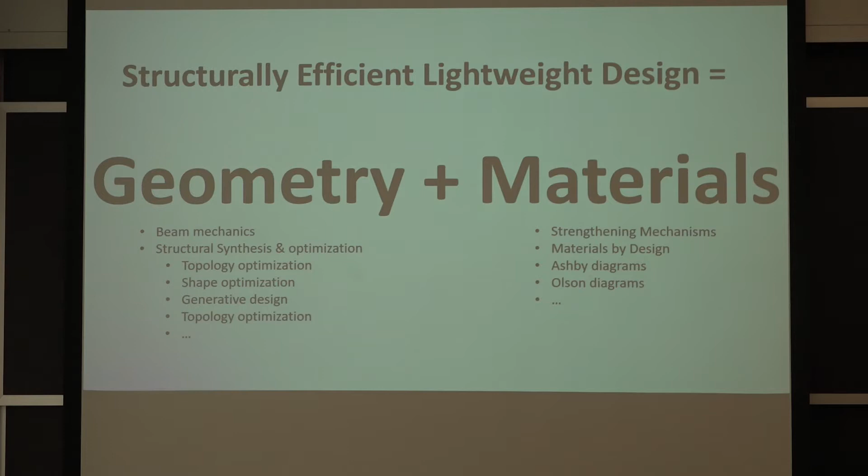We're going to start off where we left off last time, and that's lightweighting of a structure like a car body or a bicycle frame or a boat, could be a lot of things, an airplane, is a function of geometry and materials. I'm going to show you guys this every lecture, okay? Geometry and materials, because I think that's the main theme of this course, is that you can't really achieve lightweighting or structural efficiency without looking at both geometry and materials. You can't really get there. So that's one thing I definitely want you to take away.

So having said that, we're going to start off this lecture with a story. So here are two basically useless cars. You're lucky if you can get one person in either of them. You can't get anything else in besides there. You can barely get a sandwich in these things. These are tiny little cars. They're basically for people who have a lot of money to play on racetracks. They're not very useful. In fact, what's even surprising is they don't even get good gas mileage.

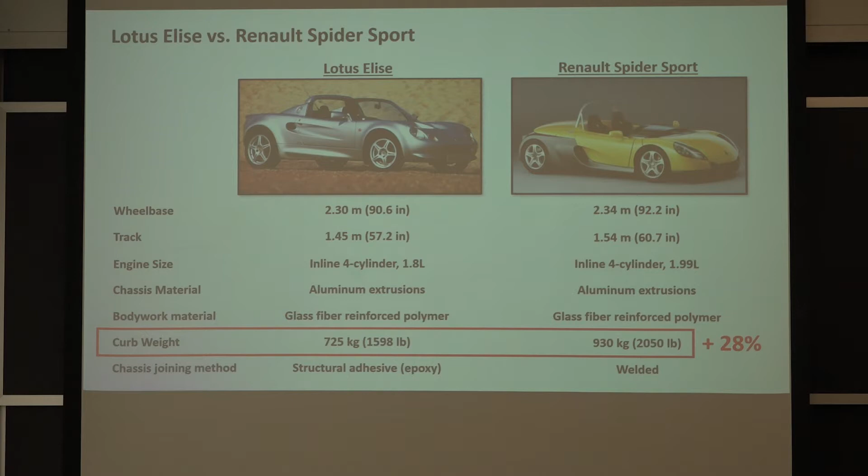On my right is the Lotus Elise, and on the left is the Renault Spider Sport. These cars came out at roughly the same time, about mid-90s, like 96 or 95. These cars have roughly very similar wheelbase, the distance from center line to center line of the wheels, and basically really close to the same track. The Renault is a little bit bigger by a couple inches, but not dramatically so. They both have a tiny little 4-cylinder engine. The Renault is a 2-liter and the Elise is a 1.8-liter, pretty close to the same.

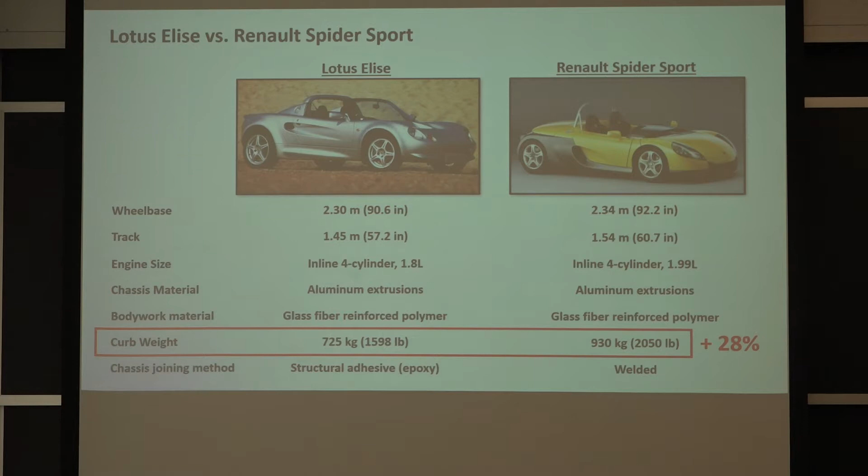Both these cars were somewhat revolutionary in that the primary load structure was made from aluminum extrusions. Do you guys know what aluminum extrusion is? There's ways you can take a billet of aluminum and jam it through a die and form a straight member with a uniform cross-section. They're very popular, like window frames use a lot. This is an extrusion right here, this aluminum piece on the board. You see a lot of them around.

Anyway, now here's where the kicker is. The Lotus was about 1,600 pounds, and the Renault was a little over 2,000 pounds. Yet the cars were roughly the same size. This kind of struck me as interesting. Back in the mid-90s when I was a graduate student, I used to obsess about this problem all the time, about why there was a 28% difference, over 400 pounds difference in weight between these two vehicles. So even though the Renault isn't that much bigger, it still weighs 28% more.

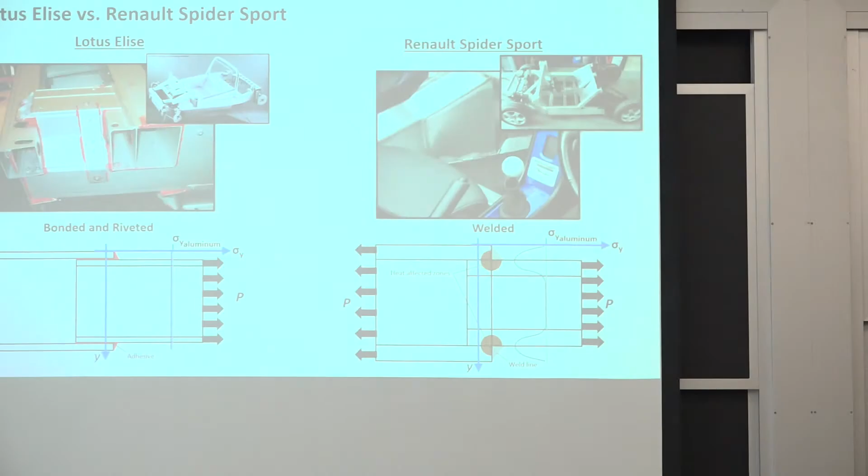So why is that? It turned out the reason came down to how the extrusions in the body structure were joined. And Professor Egger is not going to like this because I'm going to talk badly about welds, and he's interested in welds. The difference is that the Lotus chassis, as you can see in the upper right here, was glued together. The engineers at Lotus worked with a company called Ciba-Geigy, which isn't around anymore. Rumor has it they used an epoxy, although I'm not sure that's true, I'm beginning to think it was an acrylic. They took all these aluminum extrusions and joined them together using structural adhesive, similar to what would be used on an airplane at the time. On the other hand, the Renault, although it was also made of aluminum extrusions, was welded together.

The aluminum extrusions were all welded together to form the primary structure. And because of this welding, the Renault was a lot heavier.

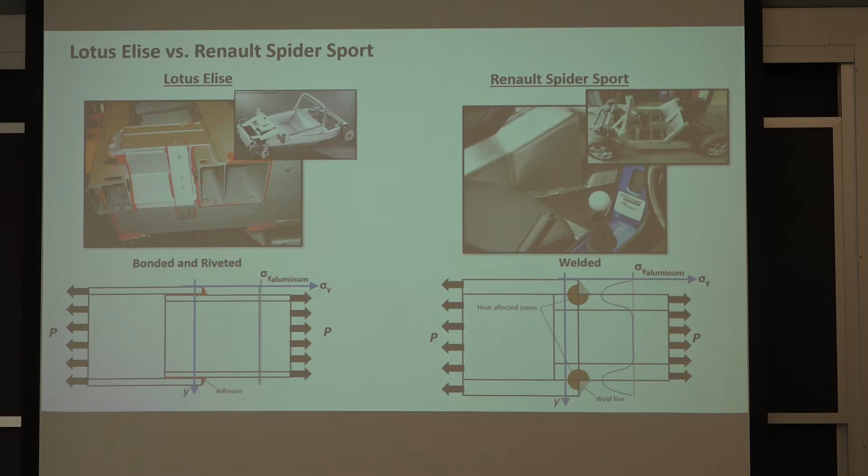Whenever you weld a material, like steel or aluminum, some people have called it casting in place. You heat the material up, it becomes molten, it flows, you put in maybe a filler material that's also hot and flows, and then it cools at some rate. That rate isn't real well controlled. What's driving the rate is all the material around it, heat transfer from that molten pool of liquid into the rest of the aluminum or steel around it. So it doesn't necessarily cool in a really controlled way.

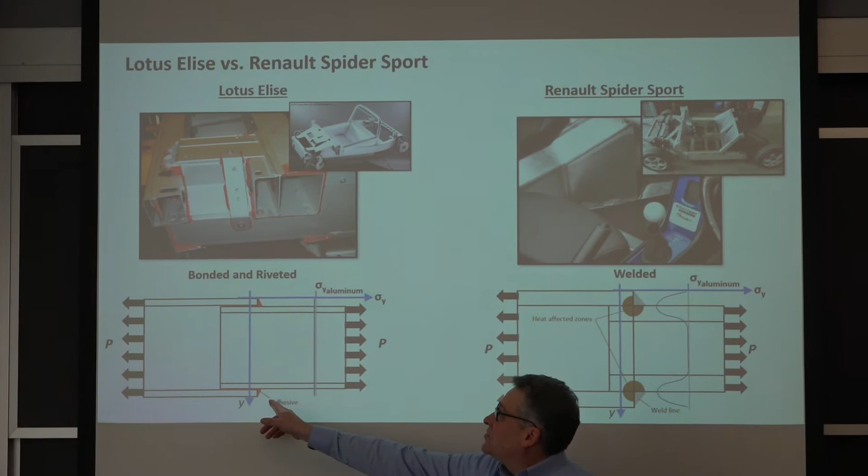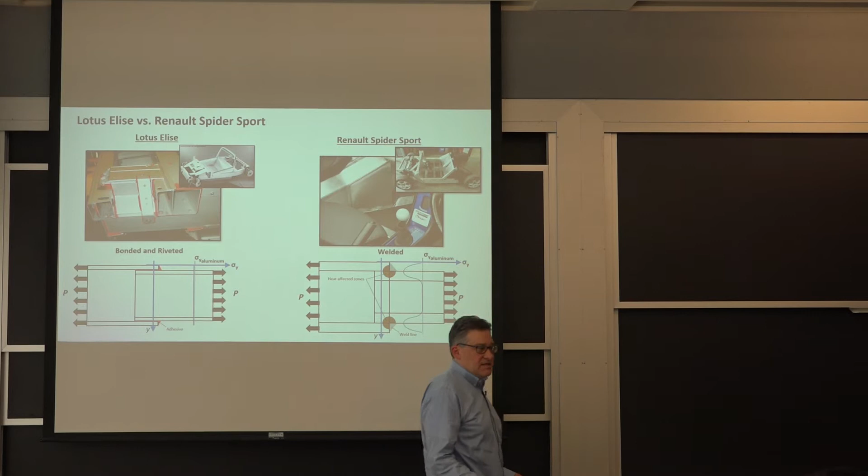And you don't end up with a microstructure that is, shall we say, perfect. If you were to plot stress across this material, here's two joints - this is just an overlap joint of, say, two tubes. The Lotus had these glued tubes, or parts that were glued together - you can see the red glue in the picture. If you were to plot stress across this material, the strength of the material stays constant because it hasn't changed. There was no welding, no heat cycle. The strength of the material is just as it was as it left the extrusion facility.

However, when you weld two tubes together, you get weakening of the material in what's called the heat affected zone. The area that got hot, when it cools, doesn't really cool to the optimal microstructure you wanted, and a lot of times it's softer than the material around it. Because of that difference in strength, the Renault engineers had to use much thicker wall thicknesses on those extrusions in order to get sufficient strength out of that joint. The Lotus engineers could go with a much thinner wall because they weren't going to lose anything.

Now, unfortunately, with extrusions, as things are today, you can't really go to variable wall thickness - you're stuck with one wall thickness. So because of that, the whole structural member had to be dimensioned in order to compensate for that difference in strength. And that's why the car weighed 400 pounds more.

So does everyone understand this? I'm pointing this example out because it illustrates how materials can affect the structural efficiency of a primary structure on a vehicle, a car, an airplane, or whatever it might be. So today we're going to talk about the materials side of this equation.

Okay, and this is the example just to illustrate, like I said - hold on a second, Victor - this is just an illustration of this example of how materials really can affect weight.

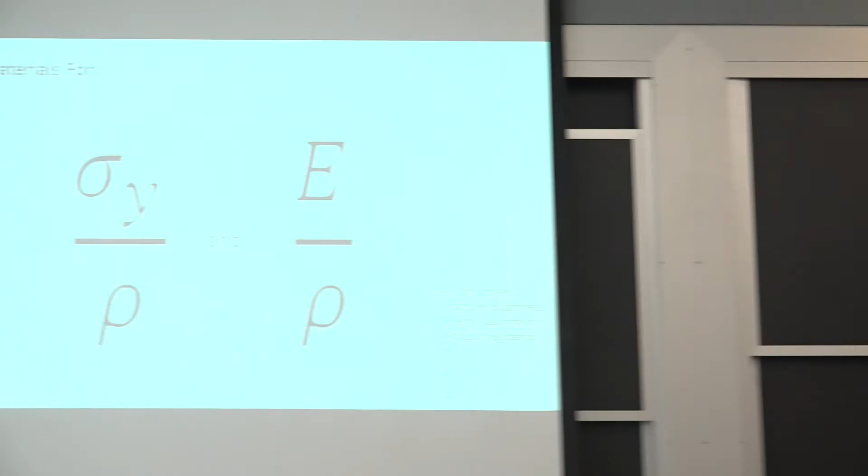So when you're interested in designing lightweight, efficient structures, the materials you need to design for, if anything, are these two factors: the yield strength per density, and the stiffness, the Young's modulus per density. These aren't the only parameters, but these are the ones I'm going to focus on for this lecture. Certainly there are other factors in making a lightweight effective structure, such as fracture toughness, energy absorption when it comes to cars for impact design, and fatigue resistance. There's a bunch more, but for simplicity we're just going to focus on these two. But how do you design a material to do that? How do you take some lump of metal and figure out a way to make it strong and stiff?

You really can't do much with density for most materials, it kind of is what it is. You get aluminum, you get steel. In fact, for most materials, you really can't do much about Young's modulus either, you're kind of stuck with what you got. There are some exceptions, like lithium-alloyed aluminum, where you can decrease density or increase stiffness, increasing this ratio, but for the most part you're stuck with E over rho. So really in this lecture, we're just going to focus on yield strength over density.

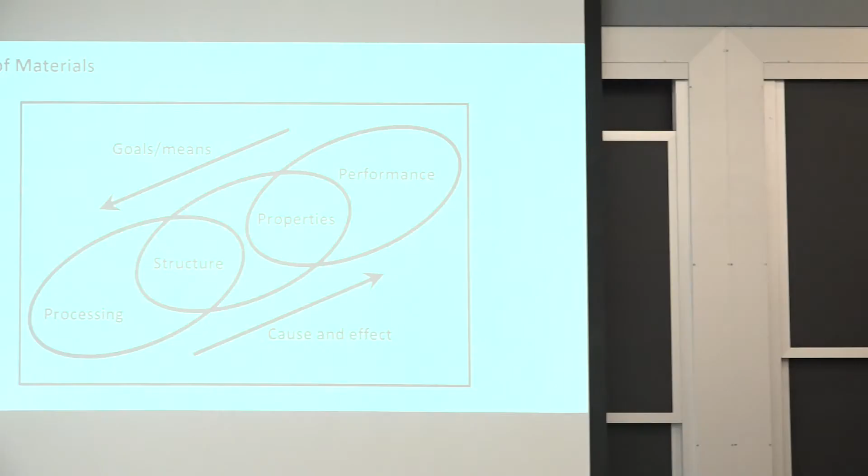Okay, so how do you do this? How many material science majors do we have in the room again? Not that many, okay. So for the material science majors, this will be familiar. The fundamental paradigm in material science for structural applications that I'm going to talk about is this here.

It's the processing, structure, property, performance of a material. In some cases, maybe long ago, material scientists went that way: they had a material, they knew it was strong, they tested it, they didn't know why. They analyzed the properties it had by measuring them, then they cut up the material and looked at the microstructure to understand why it might be strong. And then they thought about what processing they did in order to get to that microstructure.

More recently, I think material scientists have gone the other way up this chain, and that is to understand what processing would be needed to get a certain structure that will give certain strength, that will give the performance needed.

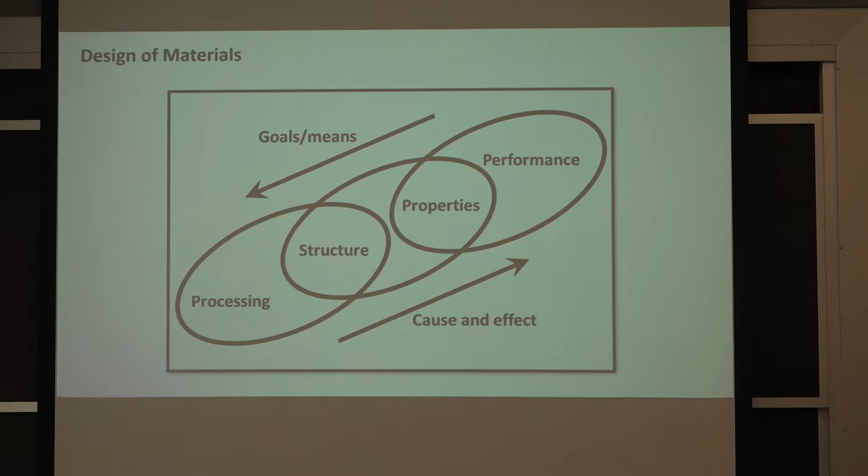As a mechanical engineering undergraduate, I was taught to look in tables, look in the back of your mechanics book and say, okay, aluminum's got a yield strength of 30 KSI, let's use that, or I want to use this steel because it's got a yield strength of a gigapascal, whatever that might be, and then just plug it into my finite element model. When I went to grad school in material science, I got slapped on the wrist for thinking like that. They said, no, you're thinking all wrong, Don, you have to go the other direction. You have to say, what strength do I want? What fracture toughness do I want? And how do I then design a microstructure or mesostructure for the material, and what processing steps am I going to need in order to get there?

Another way to think about this is what I'll refer to as the Olson diagram. I'm not sure it's officially called that, but I've been calling it this for 20 years. The idea is that you have a certain number of processes that lead to a final material product. It might be a steel where you're solution treating, quenching, and tempering, or an aluminum where you're solution treating, quenching, and artificially aging. Those processes lead to a certain microstructure, and you can begin to make connections between the processes and the microstructures you want.

Then those microstructures will lead to a property that you want, and you can begin drawing ties between them to understand what microstructure you need in order to get a certain strength. Rarely, but sometimes, you can say what would I have to do in order to get a certain stiffness, and that might be using a composite, for example.

You can't really make a steel stiffer. A stainless steel has about the same Young's modulus of stiffness as a low carbon steel, within a small percentage. A 7,000 series aluminum is about the same stiffness as a 6,000 series within a small amount. You can't really adjust that much. I just left a bottom box open for some other property, which we're not going to define. We're just calling it a generic property.

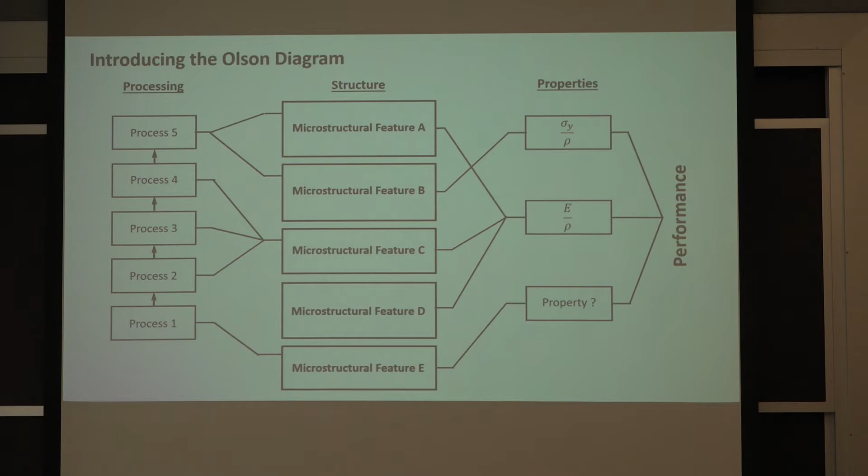In designing the strength of a material, the topic of dislocations always comes about. If you look at a lattice of atoms and calculate the strength it would take to shear one layer of atoms past another, you can, in a complicated way, turn that energy into a strength for a bulk material or bulk single crystal. Compare that to the strength of real materials in the real world, and you'll find there's a huge discrepancy between the two.

The reason for the discrepancy between what one would calculate from first principles for sliding one plane of atoms over another and the strength of real materials is because of defects in the lattice. Defects can mean a lot of things: a missing atom, an unwanted atom, or a dislocation, which is a missing column of atoms. If you apply a shear stress to a single crystal with this dislocation, this missing column of atoms, as that dislocation moves from the stress, the material deforms in shear.

That really is the fundamental point of yield strength: how much energy does it take to get this material, or this crystal, to start deforming via shear? That has to do with moving this dislocation through the lattice. Do you guys understand this?

One thing you can do relates to how these dislocation lines actually move in various directions in different places in the material. When you take a piece of steel or aluminum and deform it, these dislocations start to move all over the place, and some of them will run into each other and tangle up. In some cases, you'll even generate more dislocations as you deform the material.

So more dislocations, more tangling among one another, increase in yield strength. As they get stuck and jumble up in one another, they can't move, and effectively the material increases in strength. In fact, this is one model on how this increases, but some material scientists argue that the strength increases with the square root of the dislocation density.

So there's a lot of dislocations in a material. You'd be surprised—from what I've heard, in a cubic centimeter of a piece of aluminum, there may be somewhere between 10 to the 5th and 10 to the 12th. That's a lot of dislocations in there. I've heard that if you added up the length of line of these dislocations in a little cubic centimeter of aluminum, that line can be as long as 50,000 kilometers. So it gives you an idea of how small atoms really are compared to a cubic centimeter, and how many dislocations can be in there, adding up all that line, and how much defect volume there is inside such a small volume of material.

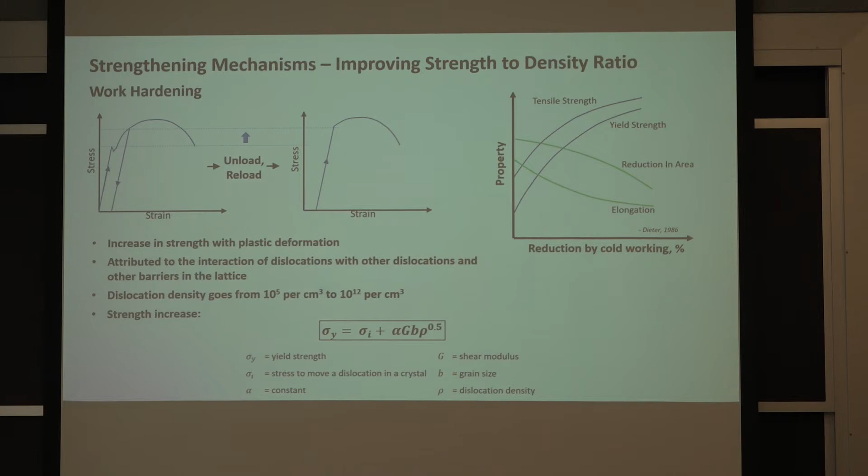Any questions on this one? Okay, so this is a really simple idea of how you might increase the strength of a material with dislocations.

Another one is called solution strengthening. So when you have a pure material like aluminum, and you add, say, copper, you're alloying that material. Those copper atoms, or whatever it might be—maybe magnesium or manganese or a variety of different materials, silicon, all kinds of things go into a commercially available aluminum—those atoms have to go somewhere. At first, when they're added fresh from the melt at the aluminum mill, those atoms either go to an existing lattice site, called a substitutional element, or they go to an interstitial site, between the atoms.

Typically, let's call the alloy the solute, and the base aluminum material is the solvent. Make sense? Solute, solvent. Solute's the alloying element, solvent's the mother material.

If the solute material's diameter, or the lattice spacing—the distance between atoms—is within about 15% of the solvent atoms, then typically those atoms will go to a substitutional position. For example, copper and especially magnesium will go to a lattice position; it's a substitutional alloy. Now, a material that's much smaller, like if you were to add carbon, boron, or nitrogen to aluminum, they're so small that they can't take up a lattice position. Instead, they take an interstitial position in between the atoms.

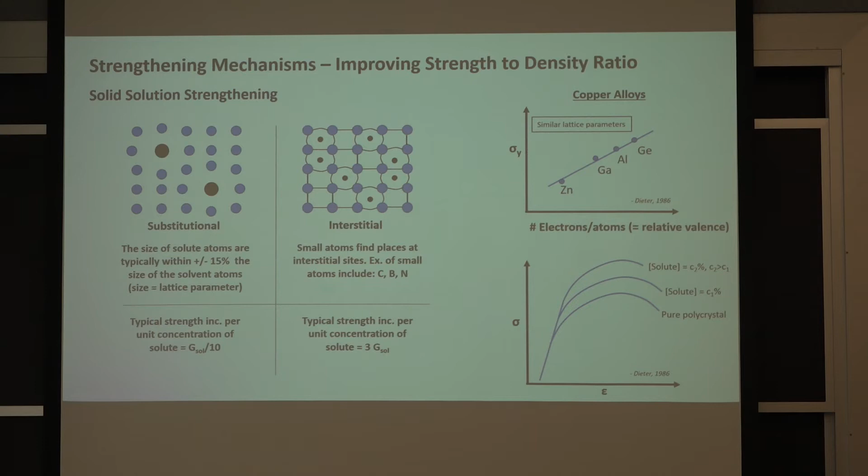So this is, again, the same thing as before. You're just finding a way to stop dislocations or make it more difficult for dislocations to move through the lattice. That is effectively an increase in yield strength.

Another tool is called precipitation hardening. For example, with aluminum, the aluminum comes from a mill. They take a bunch of aluminum and a bunch of alloying elements and heat it all up, mix it together, and then cast out a slab.

That slab will have what's called an alpha plus theta microstructure, so it's a dual phase material. That material comes straight from the mill, straight from being solidified after being mixed together.

What they'll do for like a 6000 series aluminum or a 7000 series aluminum, which are common aerospace alloys, is heat that material up to about 500 degrees Celsius until it forms a solid solution. So all those atoms that were in these little second phases, through the temperature, those second phases will break apart and go into solution to form a solution strengthened alloy.

In order to lock that in position, that material is then quenched. Now you've got a solid solution that's been quenched, and it is stronger than a pure material. But what some material scientists found out long ago is that the material will actually begin to strengthen on its own. If you take that material, put it in the corner, forget about it, and come back in two weeks, it'll actually be stronger.

Through looking at the structure, what they found out is that the atoms that were in those either interstitial or lattice positions kind of came back together later, and they formed what's called a little precipitate. It's a little second phase that's in there.

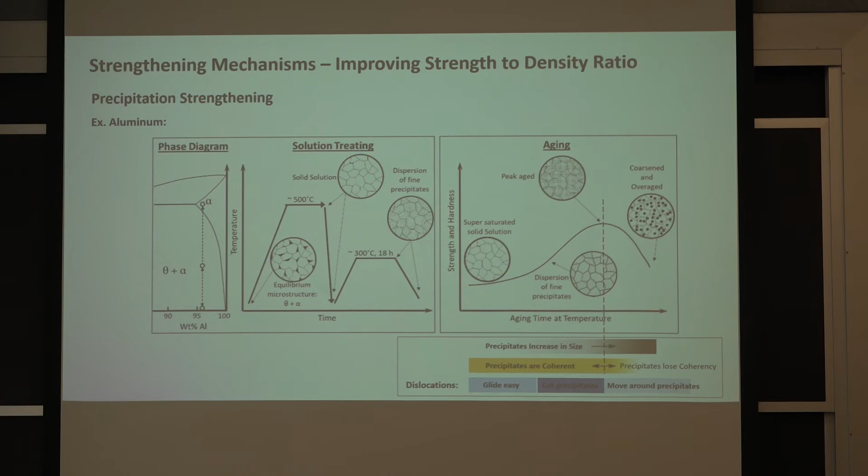When the aluminum cooled, it contracted on the stator, and the stator was unable to spin — it was stuck there. Does anybody see a problem with this? Victor does. Heating that will overage it. Exactly.

So the company started having failures. The company I was working at started having failures — these aluminum housings were cracking, and they didn't know why. They went to their finite element analysis and said, 'Gee, we don't get it. The finite element cells, everything should be fine. This part has a factor of safety of 2. There's no way the stresses should be high enough for this aluminum to fail.' But they were still getting cracks.

Then they brought me in and said, 'Don, why the hell is this thing failing?' And I said, 'I don't know, let me call the manufacturer.' So I actually took a trip to Virginia, and I found out that they were heating this aluminum at about 275 degrees Celsius. And even worse, they were putting it in an oven, and it was staying in there for an entire shift, up to 6 hours.

So when we looked at this material under the microscope, we found that the precipitates had grown to the point where you could see them under optical microscopy. And when we did some indents, we found the material had lost about 65% of its strength. And that's why they were failing.

If you would just keep it below 150°C — it depends on the alloy. For a 6000 series aluminum, you can often get away with that. For a 7000 series aluminum, you could be in big trouble if you try that. If you're anywhere near 150°C with a 7000 series aluminum, you can get a very dramatic drop-off in strength, as I've personally measured. So you guys need to be aware of this.

Another strengthening mechanism is called the Hall-Petch relationship, or Hall-Petch strengthening. It says that the strength of a material is inversely proportional to the square root of the grain size. So the smaller the grains are in a material, the stronger it's going to get, even to the point where the grains become nanocrystalline.

Most metals have grain sizes in the 10 to 100 micron range. In some cases, it's possible to shrink them much smaller than that, even down to 5, 10, 20 nanometers.

One of your professors here, Professor Chris Schuh, anyone know him? Professor Chris Schuh has started two companies based on this principle, one called Xtalic, the other called Veloxint. These companies make microstructures that are nanocrystalline, and they've been able to realize extreme increases in strength from doing this.

Now there's a problem with doing this you guys need to be aware of. Back in the late 80s is when I saw material scientists starting to work on this. I had a friend in grad school who found a way to make nanocrystalline nickel. He took a piece of nickel, melted it, and vaporized it using high pressure gas, then solidified those little nickel particles on a cold finger, like a piece of chilled copper.

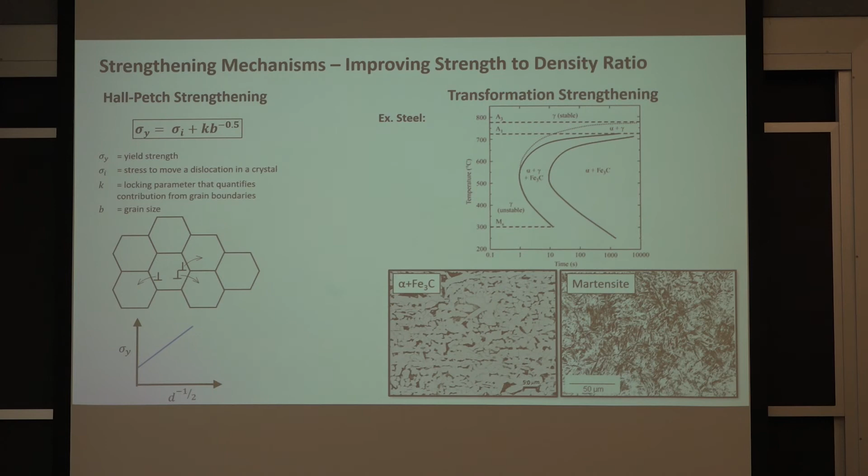This relationship—you can find probably a hundred papers online that confirm it's true. I've actually done this personally with indenting to see that it really does work. There's some difference of opinion about why it works. Some material scientists believe the issue is that it takes a lot of energy for a dislocation in a grain to either jump the grain boundary or push the shear it's deforming by into the next grain. There's energy associated with moving that shear deformation over a grain boundary, and that increase in energy is what gives you an increase in yield strength.

That's one theory. The other theory just says you have a bunch of grains, and there's going to be so many dislocations in a grain—if you make the grains smaller, you effectively increase the dislocation density. If you increase the dislocation density, you're increasing the B there, right? That's the same as increasing the strength. Some scientists have shown that dislocation density really is inversely proportional to grain size—smaller grains, more dislocations, higher strength. Does that answer the question?

I guess what I was wondering is whether the grain boundary was a dislocation, or whether the dislocation was within the grain. I don't have a clear answer for that—it's a good question. I think some people would argue that a grain boundary is a dislocation. I'm not sure if I agree, but we can talk about that.

As far as this instability with temperature, what Professor Schuh here has been able to do is coat these grains—he calls it painting the grains with another material. That second material is thermodynamically more stable than the bulk of the grain. So he's able to keep these materials nanocrystalline at room temperature indefinitely. Even at elevated temperatures, where there's more driving force to reduce grain boundary area, he's still able to keep them nanocrystalline over the long term. That's a pretty amazing accomplishment.

Another way to strengthen materials, which is closely related, at least in the case of steel, is transformation strengthening. With steel, a lot of times if you want to strengthen, let's say, a eutectoid steel, a hypereutectoid steel, or a hypoeutectoid steel with a lot of carbon but not past 0.77, you can take these materials and heat them up.

They turn to austenite. Then you can quench them. When you quench them, some of the microstructure will turn to what's called martensite.

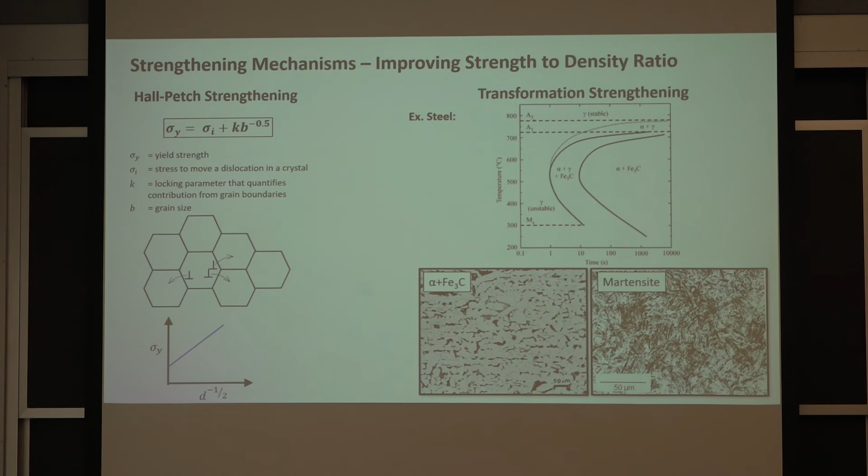On the right is what you might have before you solution treated or austenized the material, which is a microstructure of ferrite and pearlite, where pearlite is ferrite and cementite, also known as iron carbide. Then when you heat this material up, it turns to austenite, and when you quench it, it turns to martensite.

The martensite, as you can see from these micrographs, is a much finer microstructure. It's made up of tiny nanoscopic platelets that stick together, similar in concept to having smaller grains. That's why martensite is so much stronger than, say, a ferrite material—it's much more capable of tangling up and trapping dislocations because of its microstructure than was the ferrite.

So here's a case where you've changed the structure of the material to form something that is stronger than what you started with. This is transformation strengthening.

And there's all kinds of literature on what's called a TTT diagram—time, temperature, transformation. This tells you what temperature you have to heat to, how quickly you have to cool it, whether you can hold it somewhere, and what you have to do with a given alloy system to get to the microstructure you're looking for in order to strengthen it. How can you design that material?

Any questions on this one?

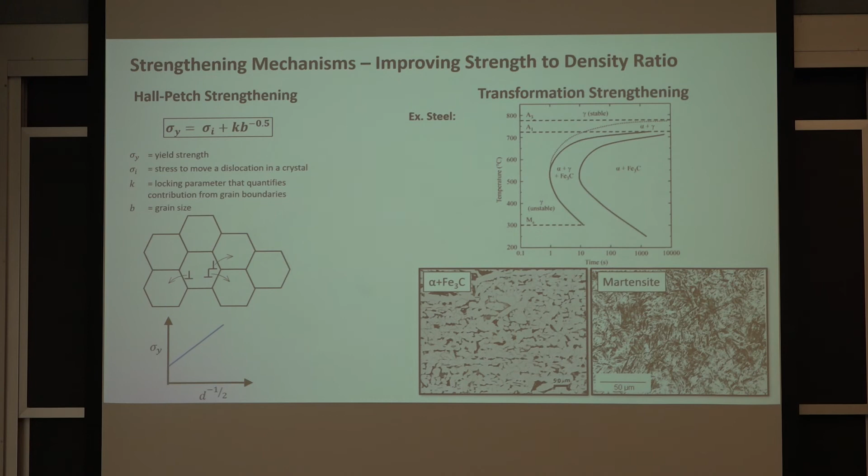Okay, the final strengthening mechanism I'm going to talk about is forming a composite. You guys have probably heard of carbon fiber—you've seen carbon fiber bicycles, skis, tennis rackets. Carbon fiber, forming a composite where you have two different phases artificially put together by man, is one of the few ways you can actually increase the stiffness to density ratio of the material.

Up until now, the four different strengthening mechanisms I showed you were all about changing the strength to density ratio. There are some exceptions, but from a 30,000 foot view, this is really the only way to increase the stiffness per density ratio.

Like I said, there are exceptions. For example, aluminum lithium—I believe you change the modulus a little bit and also decrease the density when you put in like 6-8% lithium in aluminum. There are airplanes out there, especially in the military, that use this aluminum lithium alloy.

But forgetting about that, the strength and stiffness of a composite material, where you have a matrix material with, say, a fiber running through it, is governed by the law of mixtures, which says you combine some amount of the strength of the reinforcement phase, like the fiber, and the strength of the matrix phase, like the polymer or the aluminum, related to the amount of material you put in, giving you an enhanced strength and stiffness.

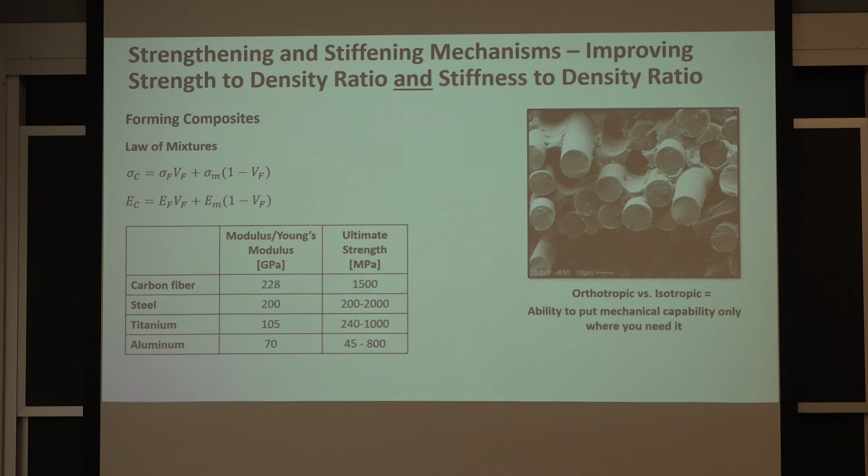So that's the argument of orthotropic versus isotropic. Okay, we're gonna go back to this one here.

Okay, so I showed you a generic version of this before. This is what I call an Olson diagram, and this is a frame, a reference frame that an engineer, a material scientist can use to design a material to get certain properties.

So let's use steel again. Let's say we start off with a steel that's from the mill. We've got iron ore, we've got some carbon, we've got some alloying elements. We put this in a blast furnace, we mix it up, we cast out ingots. Okay, that ingot can then be

worked to increase the dislocation density. Cold working does that more effectively, but hot working can do it too. You can then maybe cut that billet up into little pieces and make it into some object like a door handle, a crankshaft, a bicycle crank, something. Okay, and then you can heat treat that one.

In the case of steel, you would heat that up to a temperature again where you would transform all the ferrite and pearlite into austenite, and then you would quench that. During the quenching process, there's not enough time for that material to turn back into ferrite again, so it turns into what's called martensite.

Martensite is stronger than ferrite. Sometimes martensite is too brittle for an application, so you do what's called a tempering step, where you use precipitation hardening to increase the toughness of the material. Okay, so those are the processes that you might use in order to make a steel component.

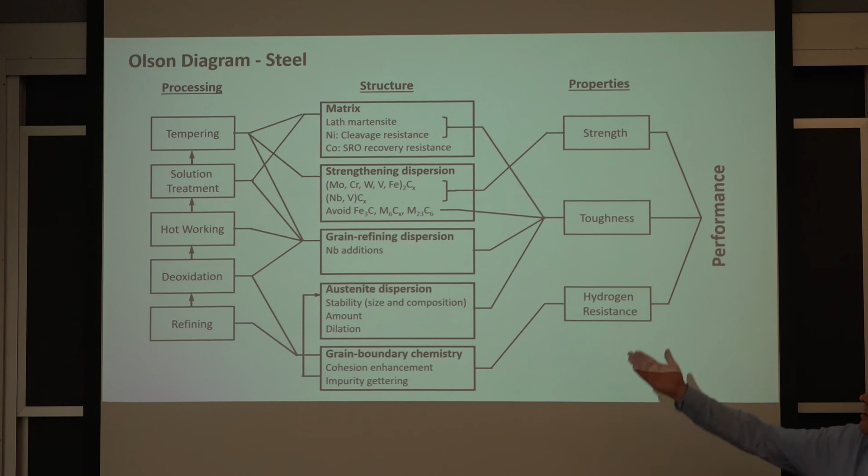Okay, you then know that these different processes produce different things in the microstructure. Okay, those things are listed here. For example, lath martensite. We talked about quenching and how that forms martensite.

We've designed that. We've engineered this. We've said we want to get martensite, so we're going to do this quenching operation. We know that martensite leads to a high strength. But then we look at this material and we say, this isn't tough enough. How do we design this alloy so that it's tougher? And that's where the precipitation hardening comes in.

So we talked about precipitation hardening, right? Precipitation hardening can be a way to increase the toughness of the material. So then you know that you're going to put some alloying elements in there that are going to form some favorable precipitates. You've designed this. You've said we're going to put this material in here because we know that during a post-quench tempering step, that material, if we can precipitate out these so-called M2C carbides, some metal plus a carbon, we know that if we have this dispersion in there of these precipitates, the material will become tougher. So we just designed toughness in.

Suppose we're looking for even higher increase in strength. We want little grains, like we talked about, right? We talked about putting little grains in the material because that gives you a higher strength from the Hall-Petch relationship. How do you do that? It turns out that niobium in steel is a very, very effective grain refiner.

I've seen this in action a couple times working on structural steels for wind turbine towers. By putting niobium in, you can very effectively increase strength. You can reduce the grain size from, in my experience, maybe 100 microns down to 10 microns. And that increases the strength while also increasing toughness.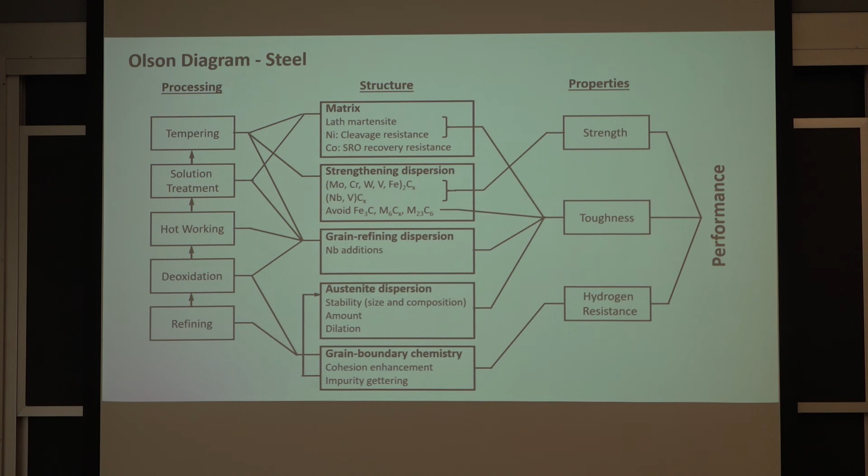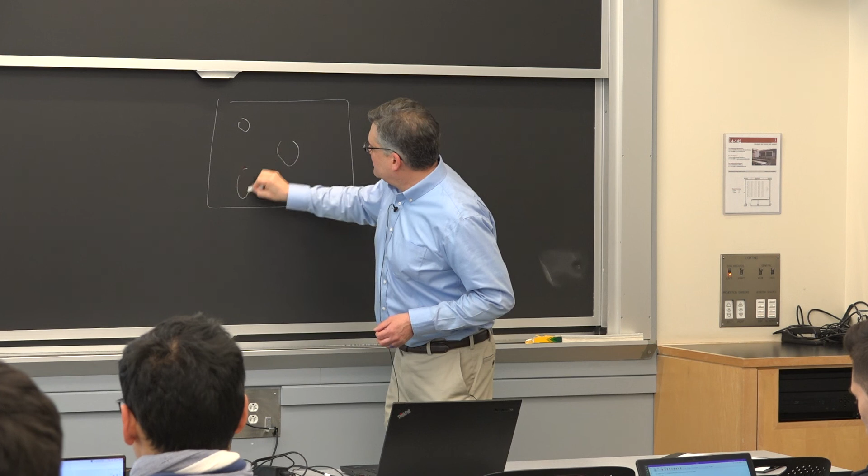Some of it stays austenite. That's important because during the transformation from austenite to martensite, there's actually a volume change. Without getting into too much deep stuff, suppose a microstructure is all martensite, and you've got a couple of grains of austenite in here. As a crack, if this material gets a crack...

Suppose it's being loaded like this, stretching open this piece of material. As this crack propagates through the martensite, because the martensite is so brittle, because there's so little possibility for dislocation motion, because the grains are so small and it's so good at tying up dislocations, the material can be kind of brittle. However, if it propagates to the point where it hits an austenite grain or chunk of material, the energy associated with that crack opening up the material can actually transform that piece of austenite into martensite.

There's a volume change associated with that. That volume change can very effectively put a clamping load on the front of the crack, which increases toughness. The toughness of a material is its ability to not propagate a crack, to arrest a crack from propagating that already exists. That's toughness—different from energy absorption.

There are other things too—hydrogen resistance, fatigue. But I've given you some examples of how you actually design a material to give you the strength properties you want, so that the final part has performance you're happy with. It's going to last a long time. It's not going to break. The plane's not going to fall out of the sky. Your car is going to absorb enough energy when you hit something. This is what we call designing materials.

So one of your more recently joined professors is Greg Olson. He just started here, I think, in January, right? Professor Olson is really like patient one when it comes to design and materials. He's done more than anyone I've ever heard of to further the concept of designing materials. He taught a variety of design and materials courses at Northwestern when I was a student there. He got his PhD here at MIT. He was an associate researcher here for quite a while, then got a tenure-track professor position at Northwestern.

He was there for a really long time. During the time he was at Northwestern, he started a company called Questek, which uses these design-of-materials concepts to build new material alloy systems, basically from first principles. He's developed, along with some very interesting companies, all kinds of models for predicting what phases will form at different temperatures—like that TTT diagram I showed you. These are thermochemical programs that predict these different phases and when they should form. That can be very useful when designing a steel, aluminum, beryllium, titanium, or an Inconel. He's also designed materials to predict what grain size we're going to get, how long our heat treatment needs to be to get the right precipitations we want—very interesting stuff.

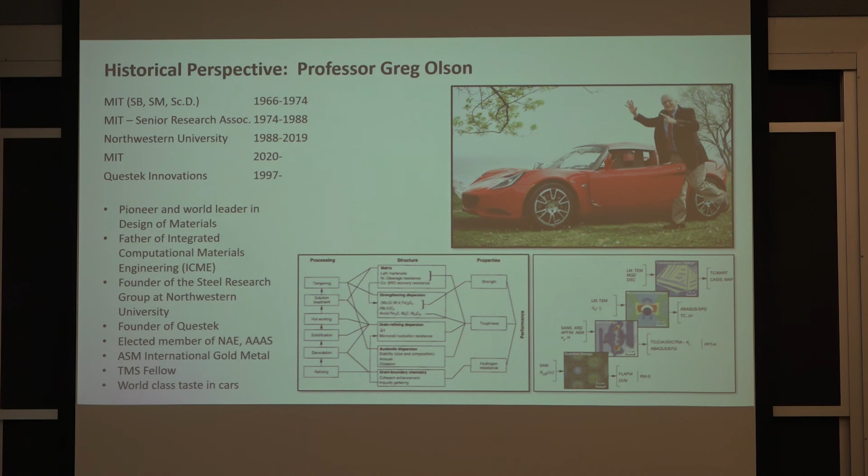He's now a professor here. The reason I'm giving you this information is that if you're more interested in this topic, he's got a lot of great papers on his website you can look up and read to learn more. As I go through these lectures, I'll give you other names of people who've written foundation papers on these interesting topics. If you want to learn more, I encourage you to go to the library upstairs in Barker and pull up these papers and read them, because you'll be amazed at the interesting things you can learn from them. With that, I'll say thanks for listening today, and any questions?